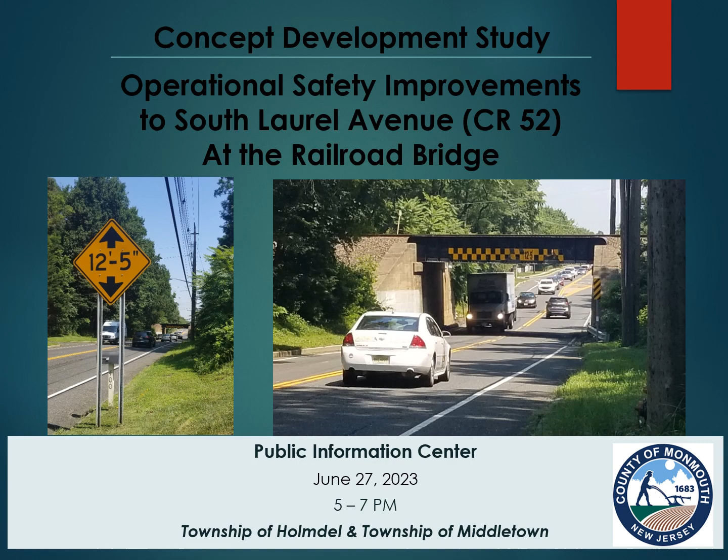This presentation will include an overview of the project. We will cover the project history and background, the limits of the study area, the existing structures within the study area, environmental constraints, traffic studies, existing deficiencies, crash history, purpose and need statement, local input, followed by a Q&A.

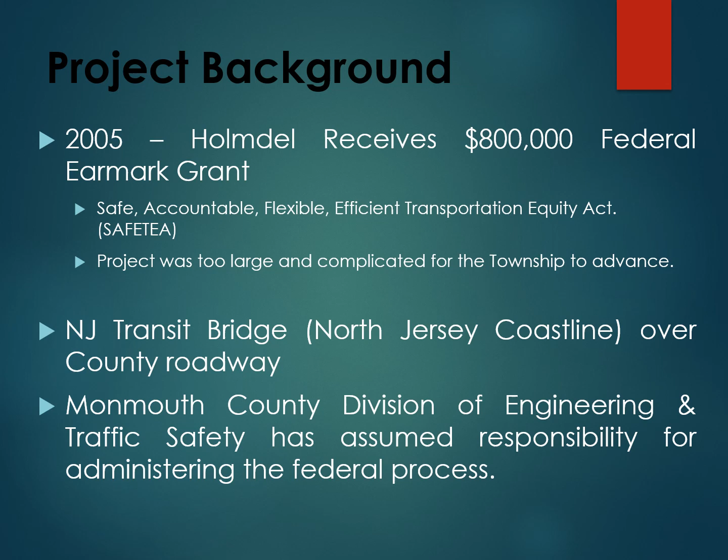This project is being advanced under the NJDOT Capital Project Delivery Process, which includes 4 phases that take a project from concept development through construction. This project is currently in the concept development phase, which includes development of the purpose and need statement, data collection, and selecting a preferred alternative with local and stakeholder input. This phase must be completed before advancing into the project design phases, and subsequently the construction phase.

At the close of concept development, a decision is made as to whether or not to advance the project into the subsequent design phases, which include preliminary engineering, final design, and then construction. Each step typically takes 18 months to 2 years.

Most of you should have received the community survey in the mail, which was distributed as part of the data collection portion of this concept development phase. The responses to that survey provided the project team with valuable insight as to what the locals' concerns are within the project corridor.

This Public Information Center is one of the important steps in identifying the needs and wants of the property owners within the vicinity of the project area, and allows the public to have input on the various alternatives that will be investigated as this concept design phase progresses. Of course, impacts within the project corridor, such as bridge replacement and widening of existing culverts, right-of-way, and environmental resources will be evaluated. However, it is important for the public to provide their input.

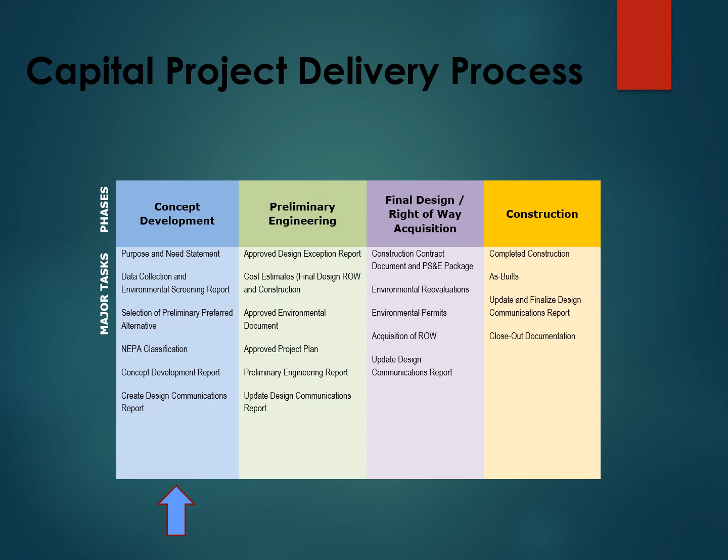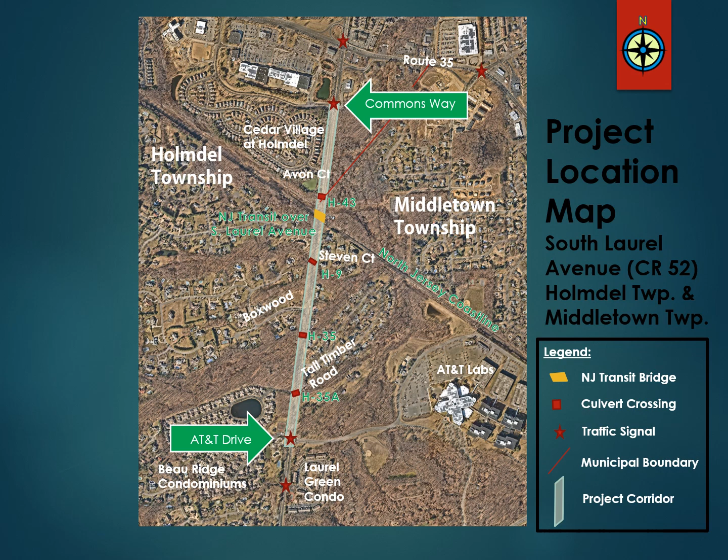As you are all probably aware, the bridge carrying NJ Transit's North Jersey coastline over South Laurel Avenue is hit frequently. This is due to its low vertical clearance. The county has installed numerous signs warning of the vertical clearance, but the crashes have continued.

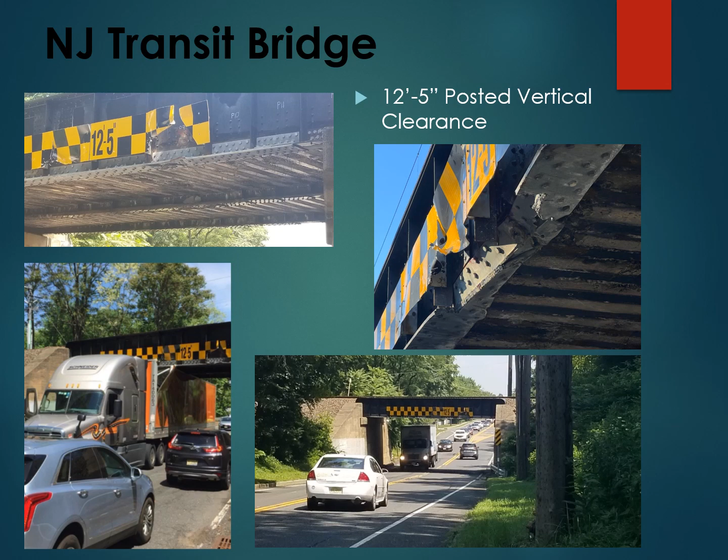Here are additional pictures of the structure. The top left picture is looking southbound along South Laurel Avenue towards the north side of the bridge. The bottom left picture is looking northbound at the south side of the bridge.

NJ Transit reconstructed the south side of the structure last spring under an emergency repair contract after a truck struck the bridge heading northbound on South Laurel Avenue. The southern half of the superstructure required replacement due to the severity of the impacts. The yellow warning markings have yet to be added to this side of the bridge.

Substandard design elements at the bridge include narrow lanes, lack of shoulders, and lack of sidewalks, which raise safety concerns for drivers, bicyclists, and pedestrians. This hourglass configuration of Laurel Avenue is a focus of this project.

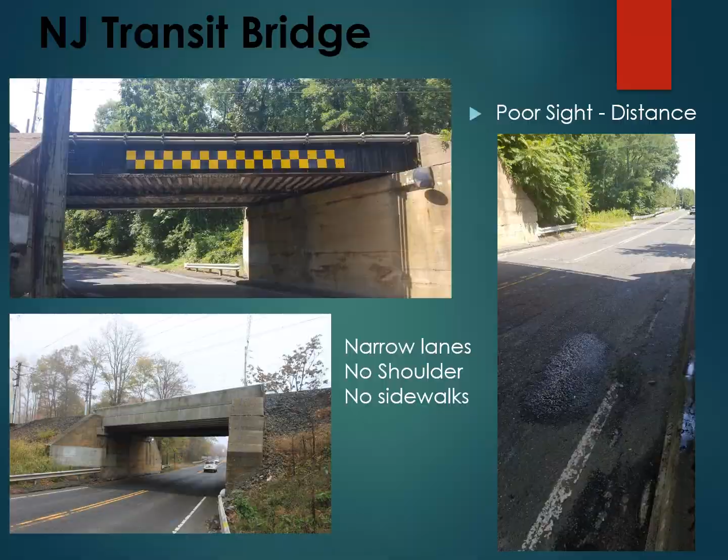There are 4 culverts within the project limits that carry tributaries to the Mahoras Brook underneath the roadway. These are important for the public to be aware of as the concept development phase of this project progresses. The stream presents environmental constraints that will be evaluated when developing various alternatives as part of this concept development study.

Their northernmost culvert is located north of the NJ Transit Bridge. Structure H43 is comprised of twin 60-inch corrugated metal pipes, which are severely corroded, and the timber head walls are deteriorating.

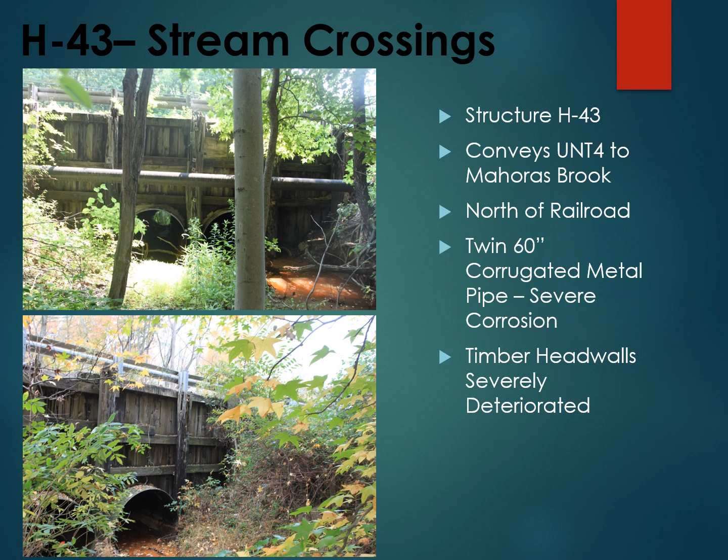The second culvert, known as H9, is located within the vicinity of Steven Court. This culvert is comprised of a 48-inch concrete pipe that crosses South Laurel Avenue on a skew.

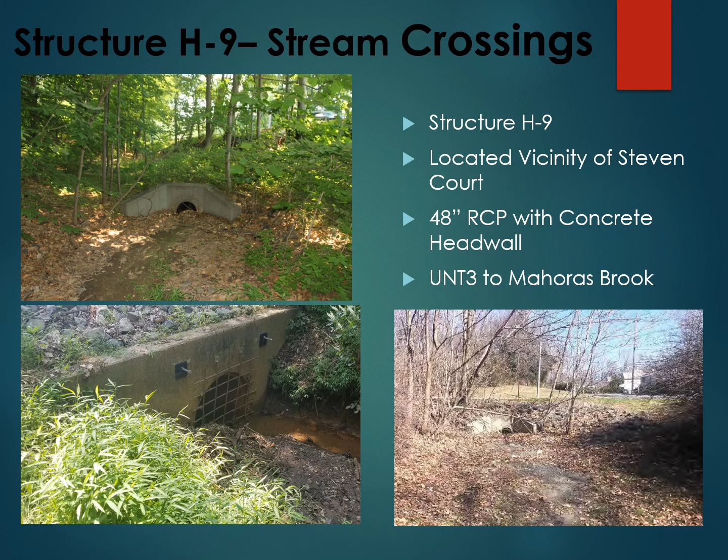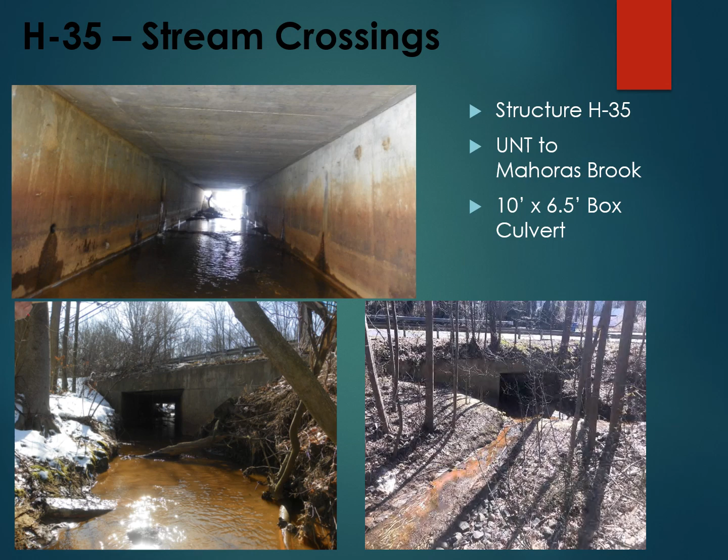The third crossing is structure H35, which is a box culvert located south of Boxwood Terrace. This culvert carries another tributary of Mahoras Brook under the roadway.

The fourth culvert, structure H35A, is located near Continental Boulevard, which is an entrance to Beau Ridge condominiums. This culvert is a 60-inch reinforced concrete pipe, which also conveys an unnamed tributary of Mahoras Brook.

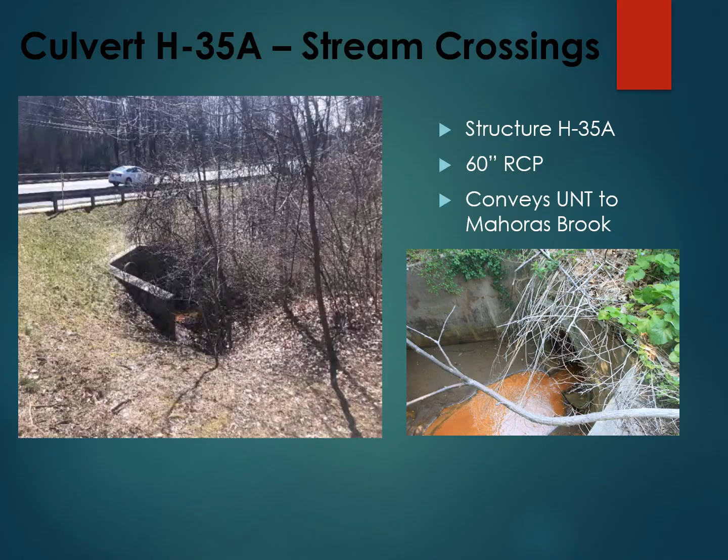As you can see, there are several environmental constraints within the project limits along South Laurel Avenue. These include the tributaries to Mahoras Brook, shown in blue on the map, their associated wetlands identified in the green crosshatch, riparian zones identified in the blue dot hatch, threatened and endangered species, as well as the New York and Long Branch Railroad Historic District identified by the pink circle and square on this map.

NJDEP recently approved more restrictive permitting regulations, which will expand the limits of the riparian zones and the requirements to manage stormwater.

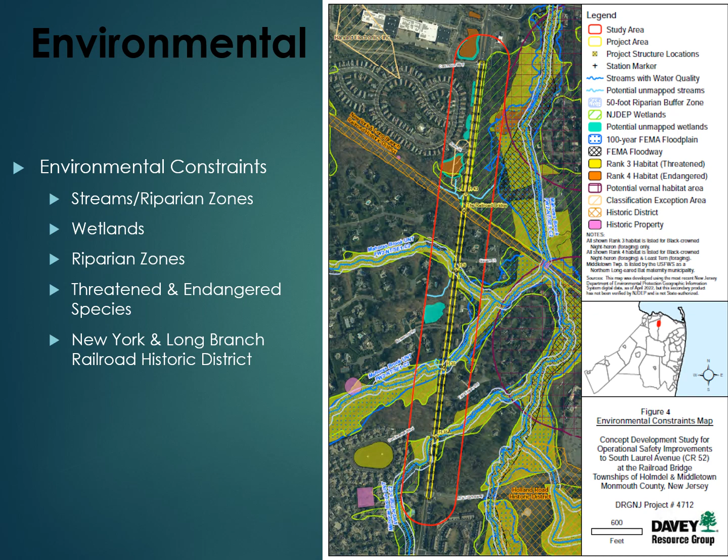There are two retaining walls within the project corridor. One is located along the northbound side of the roadway between Continental Boulevard and Tall Timber Road, and the other is along the southbound side of the roadway within the same limits.

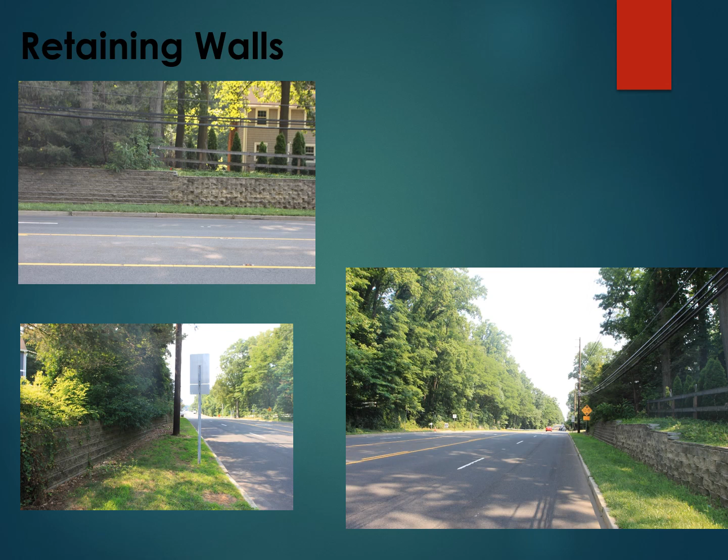A traffic analysis was performed along South Laurel Avenue. The traffic study corridor extended from New Jersey Route 35 at the north end to Garden State Parkway Interchange 114 at the south end. However, the project study area is limited to the corridor between AT&T Drive and Commons Way. The project limits are depicted in red on this map.

Future traffic data was developed using existing traffic data collected prior to the pandemic, grown to the build year of 2045 using regional traffic models.

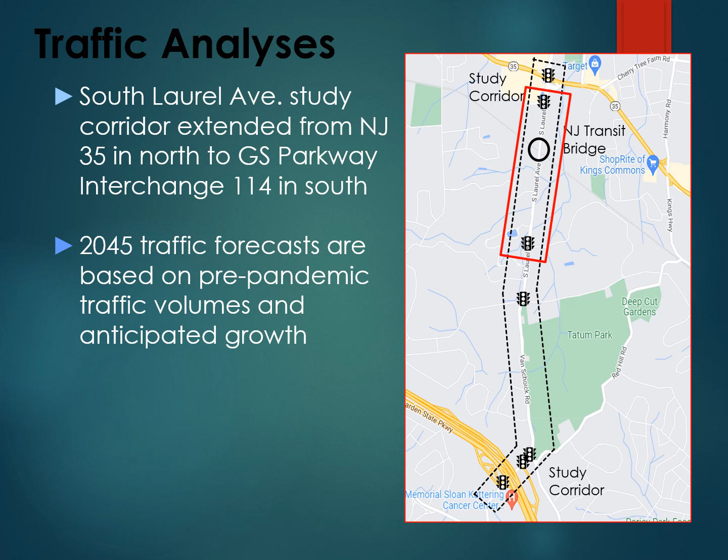This slide shows the capacity analysis for various levels of service and the respective signalized intersection delay. Level of service, also known as LOS, is a qualitative measure used to relate the quality of motor vehicle traffic service. Level of service is used to analyze roadways and intersections by categorizing traffic flow and assigning quality levels of traffic based on performance measures, like vehicle speed, density, and congestion.

Level of service A has the least amount of delay. Level of service is categorized using letters A through F, with A being the best and F being the worst, similar to academic grading.

The delay is computed for each approach and movement, and then averaged for the intersection.

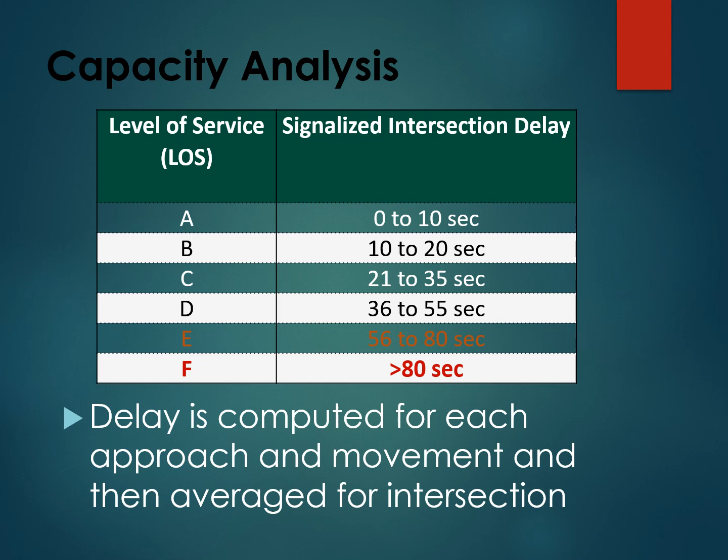The two-lane roadway under the railroad bridge was also evaluated and is forecast to operate at a level of service E.

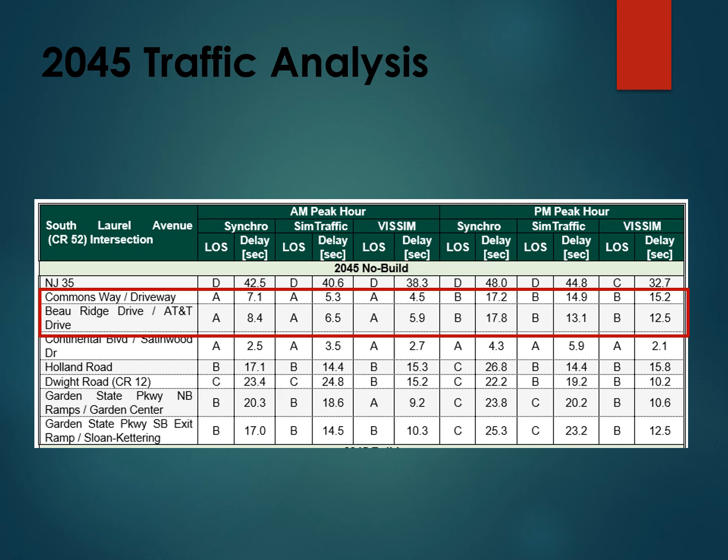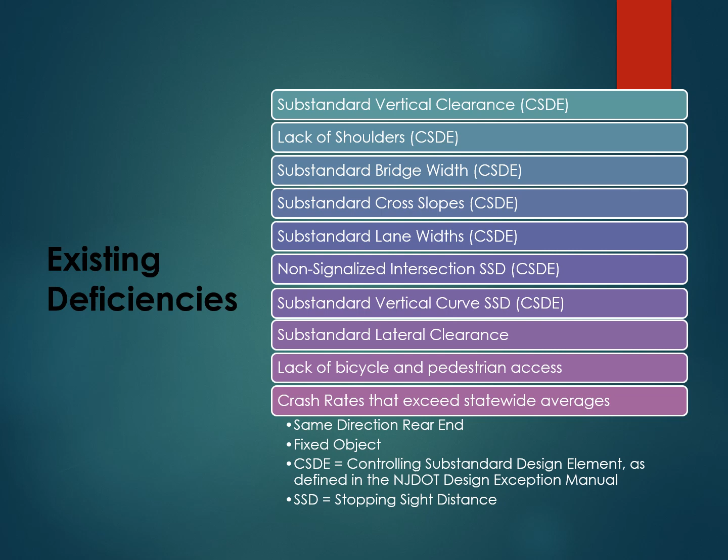There are numerous existing deficiencies along South Laurel Avenue within the project limits of AT&T Drive and Commons Way. These include the following substandard items: vertical clearance at the NJ Transit Bridge, the lack of shoulders, substandard bridge width, cross slopes, lane widths, as well as non-signalized intersection stopping sight distance, substandard vertical curve stopping sight distance, the lack of bicycle and pedestrian access throughout the corridor, as well as crash rates that exceed the statewide average.

Crashes were evaluated along the South Laurel Avenue corridor. The crash analysis and traffic studies use data from 2017 through 2019, as they use pre-pandemic traffic volumes and are more representative than the current years.

The crash data identified numerous crashes at the NJ Transit Railroad Bridge. In addition, there were several crashes at other intersections within the project corridor, as identified in the table on the screen.

As shown on this pie chart, 50% of the crashes were same-direction rear-end crashes, which are the most frequent type in the United States, and are caused largely by driver inattention and vehicles following too closely.

The second largest portion of crashes were fixed object crashes at 30%. This would include any strikes to the NJ Transit Bridge, followed by same direction or sideswipe crashes at 8%. Sideswipe crashes are the second most common type of crash in New Jersey, but the fixed object crashes were obviously much higher within the project area.

Other less frequent crash types include opposite direction or head-on crashes, left turn or U-turn crashes, and animal crashes.

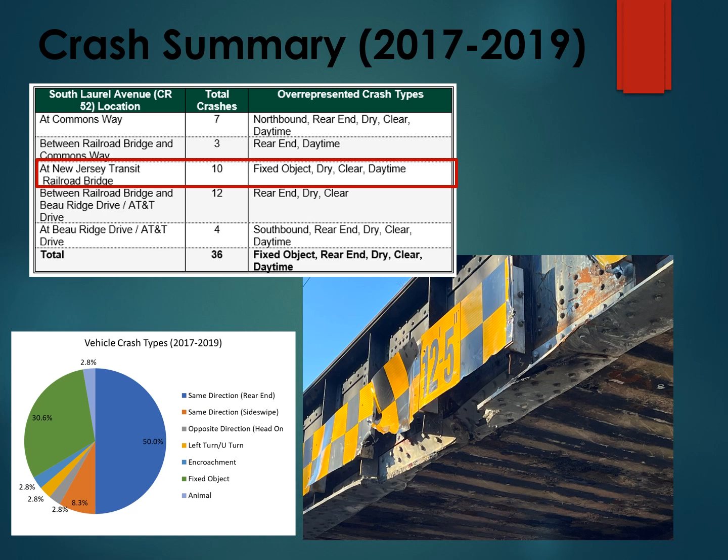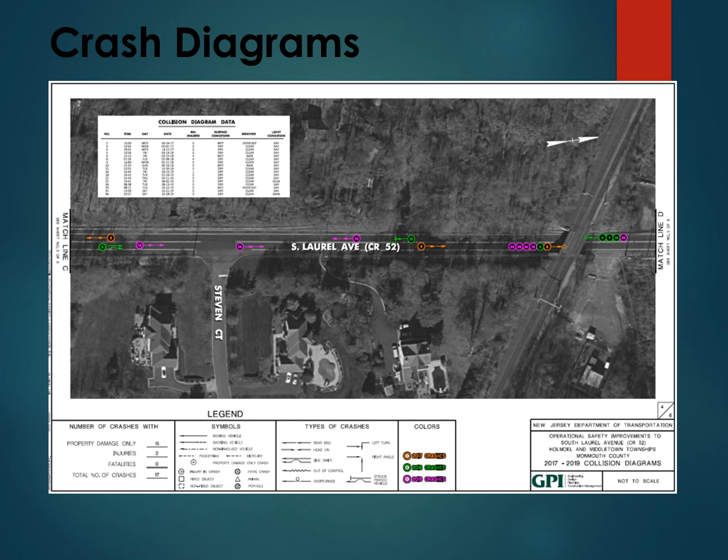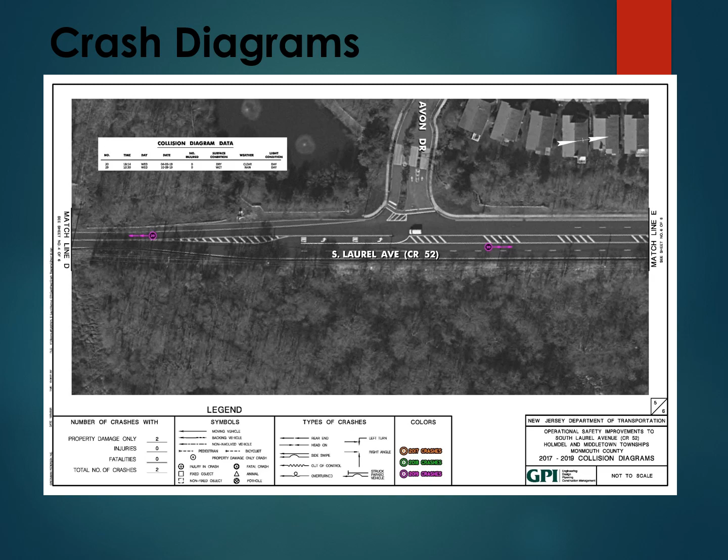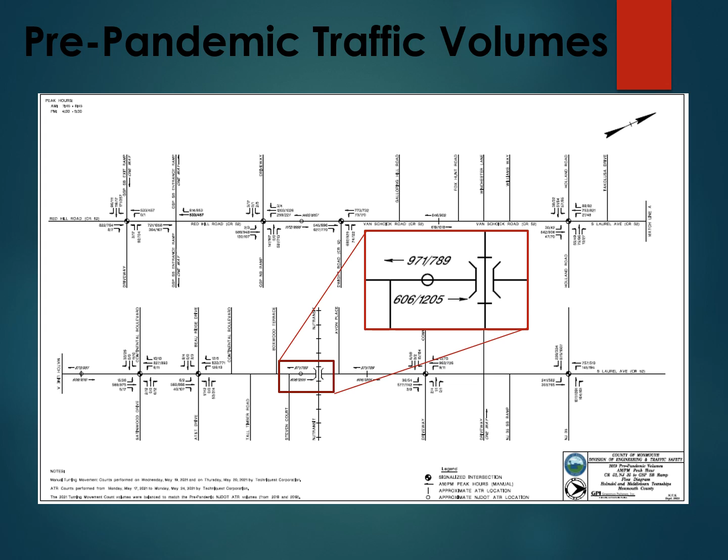This slide identifies the pre-pandemic traffic volumes in the project area. The volumes at the railroad bridge are highlighted in the red box. Note that the volumes in the southbound direction are higher during the morning peak hours and higher in the northbound direction during the afternoon peak hours, since Laurel Avenue provides direct access to the Garden State Parkway at interchange 114.

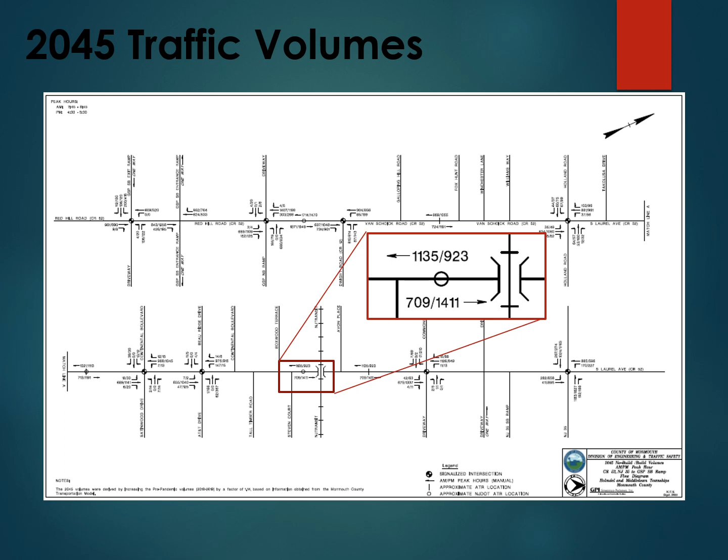This slide identifies the year 2045 traffic volumes that are anticipated using traffic projections. The volumes at the railroad bridge are again highlighted in the red box. These projected volumes are used to identify the need for additional lanes along the South Laurel Avenue corridor within the project limits.

The purpose and needs statement is the foundation of every transportation project and is a key component of the concept development phase. Information collected during this phase is critical to the development of the purpose and needs statement and establishes why the project is being advanced.

The purpose developed for the South Laurel Avenue project states: the purpose of the project is to eliminate the horizontal and vertical deficiencies at the railroad bridge to allow for safety and operational improvements along South Laurel Avenue, County Route 52, from AT&T Drive to Commons Way.

The project need documents the transportation deficiency or problems identified during the data collection phase, and the goals and objectives are the primary improvements that the project should address. It is the key factor in determining the range of alternatives to be considered, developed, and evaluated to determine if the alternative meets the project purpose.

The project need includes the following: South Laurel Avenue between the project limits does not currently meet the design standards for vertical and horizontal clearance at the railroad bridge, intersection sight distance at unsignalized intersections, as well as lane and shoulder widths.

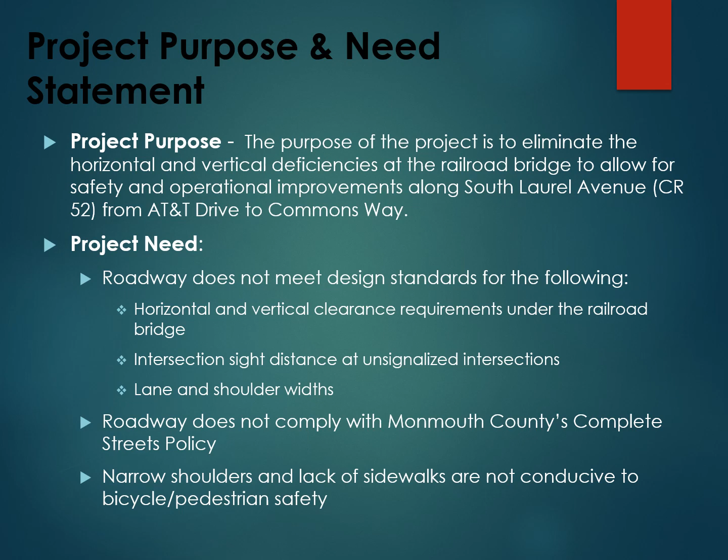South Laurel Avenue does not comply with Monmouth County's Complete Streets policy. Narrow shoulders and the lack of sidewalks are not conducive to bicycle and pedestrian safety. Additionally, crash data indicated that crash rates are higher than the statewide average for both head-on and fixed object collisions.

Goals and objectives: in addressing the project's purpose and need, design of the project will also consider additional goals and objectives via stakeholder and public outreach, such as this Public Information Center. While the project may not be able to fully satisfy all of these additional goals, as many as possible should be addressed. They are as follows.

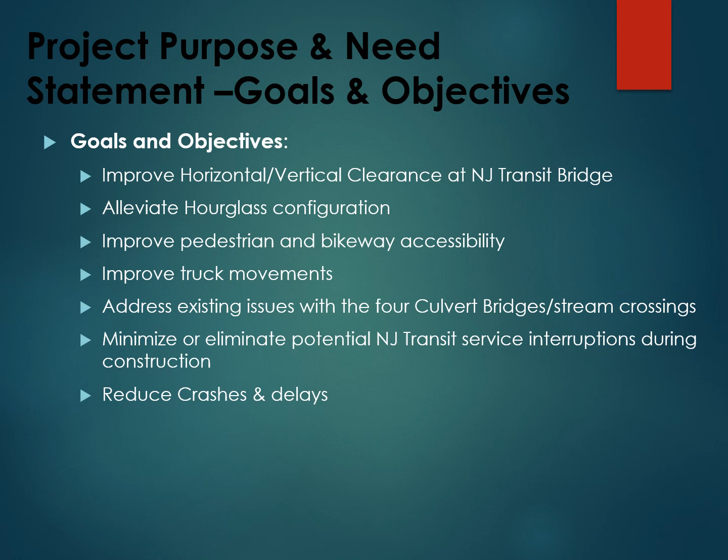Improve horizontal and vertical clearance at the NJ Transit Bridge, alleviate the hourglass configuration at the bridge, improve pedestrian and bikeway accessibility, improve truck movements within the corridor, address existing concerns with the 4 culvert bridges within the project limits, minimize or eliminate potential NJ Transit service interruptions during construction, and reduce crashes and delays along the project corridor.

A community survey was mailed out in late December. The survey was mailed to property owners, retail owners, condo HOAs, and businesses along the project corridor within Holmdel and Middletown Townships, in addition to stakeholders, which includes local officials, schools, engineers, emergency services, and NJ Transit.

We received 11 responses to the survey, which help us get a better understanding of the concerns that the local property owners have with the project area, as well as gain an understanding of what they would hope to see come out of a project along this corridor.

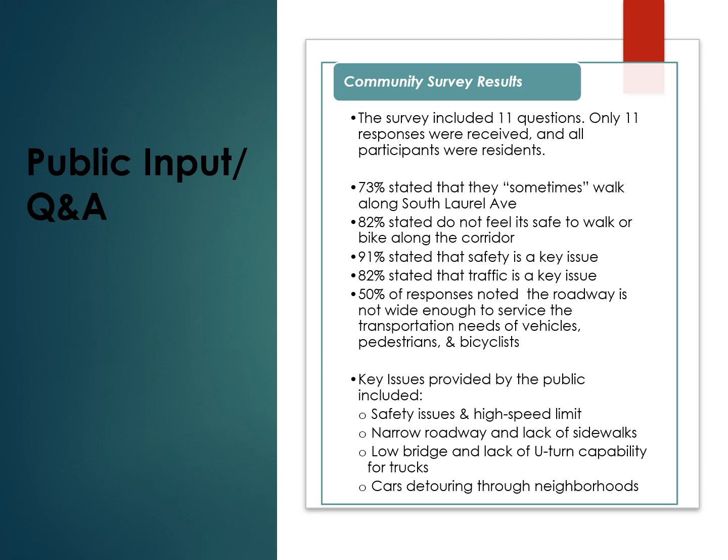The next steps within the concept development phase of this project are as follows: to develop and evaluate the alternatives. As previously noted, the alternatives will be developed and evaluated to determine if they satisfy the purpose and need statement. We develop this statement before we develop the alternatives.

Therefore, our alternatives will address the horizontal and vertical clearance at the railroad bridge, lane and shoulder widths, and the lack of sidewalks. We will then present the developed alternatives to the local officials and then subsequently follow up with another public information center where we will present the alternatives to the public.

Then we will select the preferred alternative. The concept development process will then be summarized and presented to determine if it can advance to the next stage of the project delivery process, which is preliminary engineering.